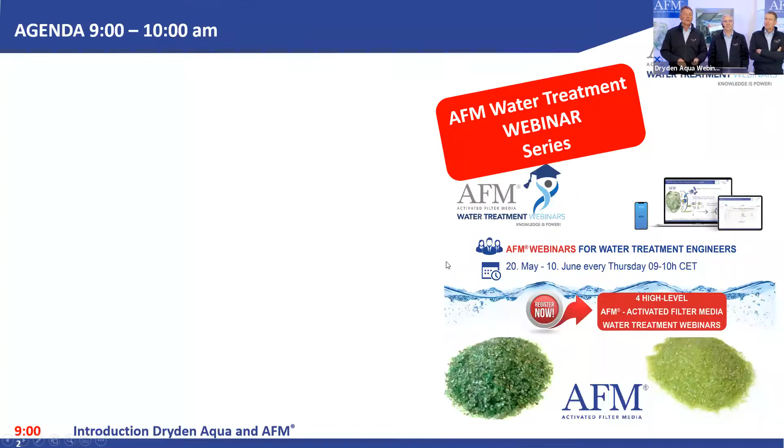So today we give you an overview about Dryden, who we are, and mainly about AFM, what are the benefits and where to use it. And we will have in the next 4 weeks 3 more seminars where we go more in detail in specific applications. Next one. Oh, sorry, I have to lead. So Jochen, you want to lead us quickly through the agenda? Okay, agenda. I don't want to go to any of these lines individually, but of course we have now the introduction of Dryden. Then we go through our filter media, AFM, just explain how it works, how it is produced. And at the end, you are welcome to bring up your questions.

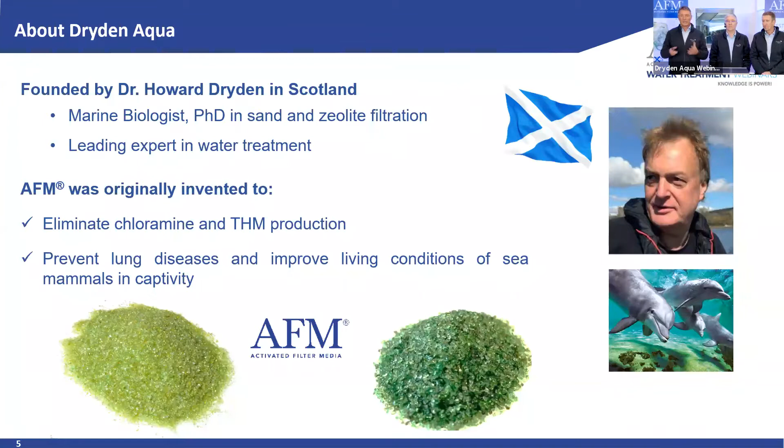And I got a virus, ladies and gentlemen, a very dangerous virus, the Dryden virus. And this virus we want to vaccinate into you because it makes your immune system on water treatment so much better. So I became his biggest fan, very good friend, good customer. I brought him to the pool industry, not just in Switzerland, also in other countries in Europe. And then 6 years later, he asked me if I want to move into Dryden, and we're talking about this in a minute.

Today, we are in 3 different sectors. One of them is pools, where I'm coming from. This is still our dominant sector, where we do 50% of our sales. And why is this? Because I'm coming from the pool industry and I had all my network, and we do really perfect pool water treatment, as you can see here with these 2 beautiful kids. Her mom is on the call. This is my wife.

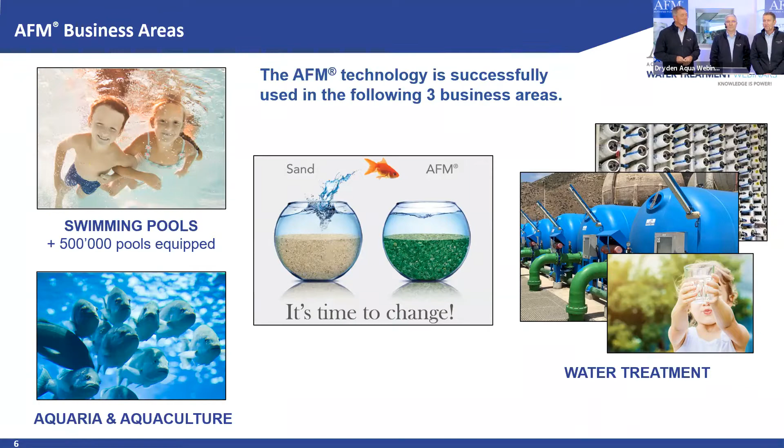About 10% we do in aquarium and aquaculture, and about 40% in water treatment, only 40. And this is why he is here. And this is why you are here, because we want to move this to 50, but not by decreasing the pool business, obviously. And it's also the strongest growth segment by far. Yes, by far. And we are just jumping in.

And here you see a little bit our roadmap, our agenda 2030. You want to lead this? Yeah, sure. So it kind of shows you where we are coming from. It really started out in about 2013 when we built our first factory in Scotland. As of 2012, it was a very small factory, very old-fashioned, doing a brilliant product, but we had to buy a lot of resources and only made the activation. And the turnover was roughly £1 million, which at that time was roughly 1.2, 1.5 million euro.

And we invested in a very latest fashion, state-of-the-art factory where we did all the process, and we invested 9 million from 1.5 sales. We invested 9 million, so it was quite crazy. Yeah, crazy. Brave. I would call it brave.

On top, I brought in Philip, because Philip and I have been friends for more than 30 years. We met in the army. We were together in the officer school. He also was not in the pool business. And I told him, hey, I have here a new challenge. It's fantastic. You will have to work double as much as you did so far, and you can earn half of what you had. And he said, I said yes, but I think I misunderstood. But anyway, I'm still here. So we haven't done it for money.

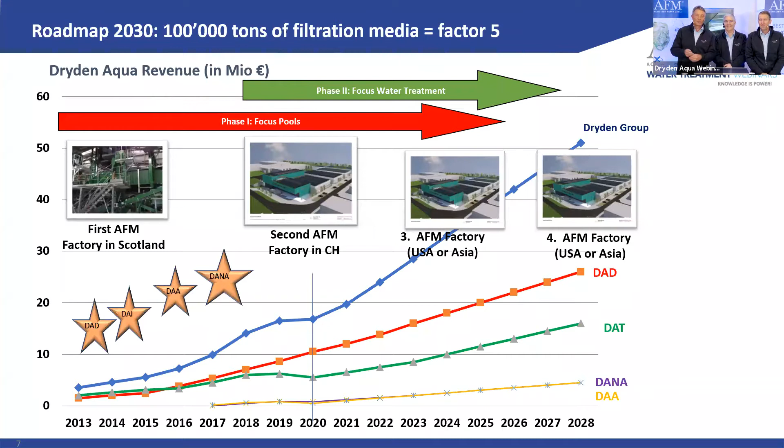And the biggest growth opportunity that we see, and this is our focus for the next years, is our growth in water treatment. This is why this is green. It's not red because we are communist. Okay, that was just the first phase where we focused on pools. Now our focus goes very much on water treatment without ignoring the pools and the aquarium sector.

Exactly right. Where are we? So we have our 2 factories, one in Scotland, one in Switzerland, opened 2013 and 2020. We have a sales office in the US. It's not just a sales office, we also have 5 warehouse locations in the US. So we are ready to supply any projects and any customers in the US. We also have a logistics base in Germany for some of the European or Eastern European markets, also Russia. We have a sales office in Shanghai with a partner there that we work together with. And so we have a really good setup worldwide to do business.

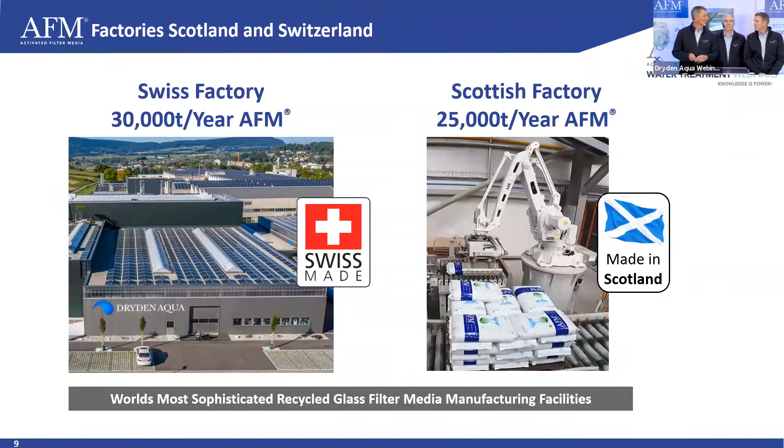And we do this because we have really the world's most sophisticated glass media manufacturing facilities. The one in Scotland from 2013, we just upgraded it over the new year. We closed it for 5 months and invested another 5 million euro to bring it on the same level as this very beautiful factory that we have here in Switzerland. So the Swiss factory capacity, roughly 30,000 tons. That would need 50,000 tons of raw glass. And in Scotland, roughly 25,000 tons. And we estimate to come close to 30,000 tons produced and sold media this year.

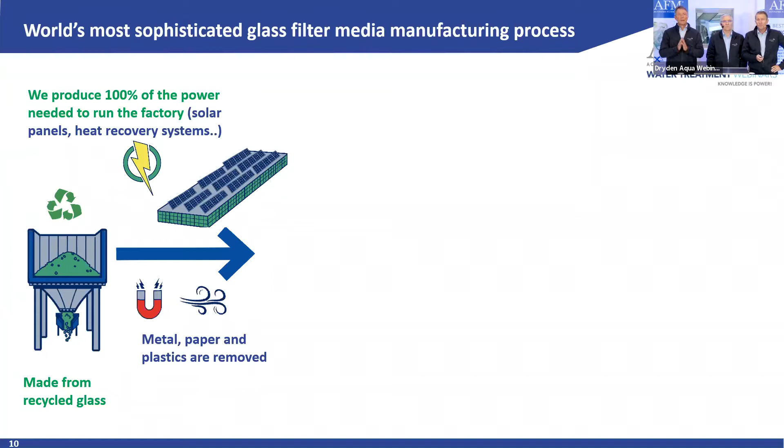Okay. Do you want to lead us quickly through the process? So how is AFM made? Let's quickly talk about this. So we start with 100% recycled glass that we buy from the surrounding areas. The glass comes in, it's completely decontaminated, cleaned, and washed. Here in our Swiss factory, we use 100% solar power to do this. We have 850 kilowatt hours. All our roofs, even the facades, the green color on the facade, this is also solar panel. So we really try to do it as green as possible.

So paper, metal, plastics are removed by putting the glass through a wash cycle, a spiral washer. Decantation, of course, we filter our wash water. We use our technology. It's wastewater, absolutely, and it's quite a heavy wastewater, with decanters and then AFM filters, of course. And really, we just need water to backwash our filters. And for this, we use rainwater because on all our roofs we collect the rainwater, and we have 1,000 cubic meters of rainwater collection. So we close the loop, even the sludge.

I mean, imagine the glass comes in with 50,000 grams of organics. And after the washing process, it's 5,000. So we reduce this from 50 to 5. It's a factor of 10. It's a huge amount. And this creates sludge. And this sludge goes to the biogas, again, to make it as sustainable as possible.

I mean, it's very important to show here that we are also already doing water reuse, which is becoming one of the big topics in the world, right? Water scarcity is increasing, and we can demonstrate, even in Switzerland, where we have a lot of rain, we try here at Dryden to 100% use our own rainwater. Closed loop cycle, exactly right. But we do it because it's also more economic, otherwise it would be expensive. And then this was the washing, and then we go to the real factory.

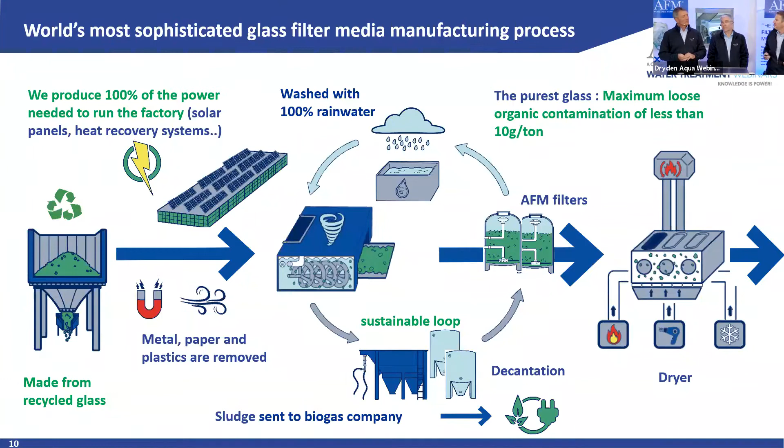Then we go through a drying process, and also in this process, we completely sanitize the glass. We heat it up to what temperature? 70, 80 degrees. 80 degrees. And we have to dry it because in the next step, we go through a color sorting. So we sort out the white glass. We don't want to have white glass. This is a very cost intensive process. First, this cleaning is very intensive, very costly. And then in these beautiful machines, amazing machines which cost really a fortune, we remove all the white glass and just keep the green and the brown. Yep.

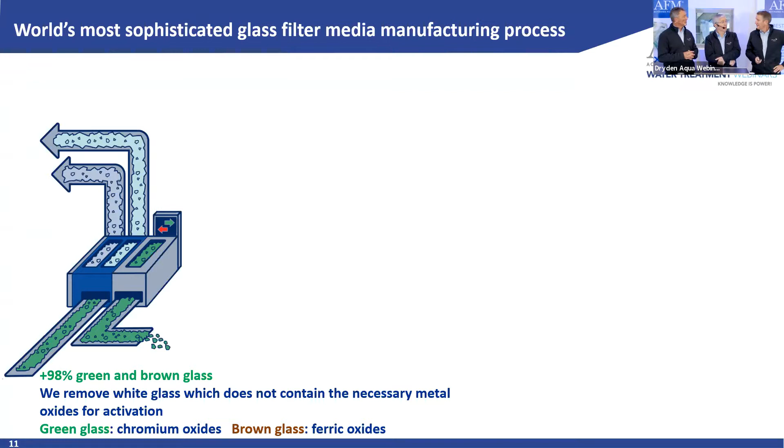So why do we... wait, I'll tell you, in 2 minutes we'll talk about this.

So now we have the green and brown glass only. It's washed, it's sanitized, it's clean. And now it goes through 3 cycles of crushing with soft crushers—soft because our grains are soft. That's why we call it soft vertical shaft impact. Then it goes through screening and sieving.

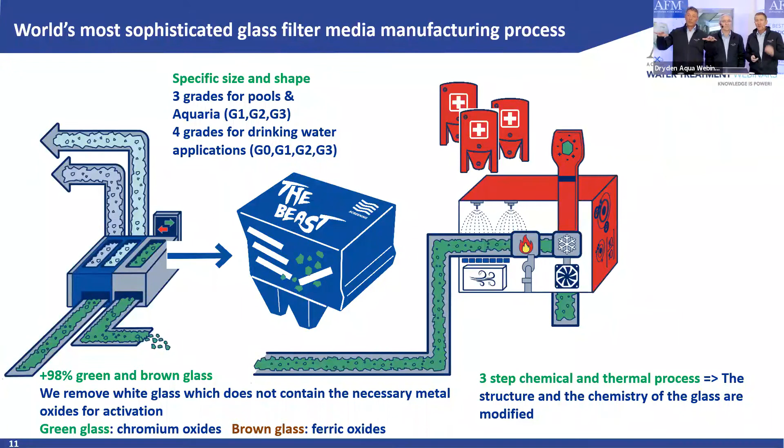We have two screens: the beast, the big one, and the beauty. You'll see this in the video. The beast is the biggest screen in the world in a non-mining application—the biggest in the world. It's a little bit like Tesla; we don't call it a gigafactory, it's a mega factory. So now we have the precise particle size and shapes that we want, and this is now the very best glass media you can have before activation, but it's not AFM yet.

Now we go through the activation process, and this activation process we will not share completely with you. Everybody's interested—what exactly are you doing? We will not tell you. It's like Coca-Cola, they also keep their recipe. It's a 2-step chemical process. This is what we can share.

Then a thermal process where again we heat up the AFM to a very high degree, giving the product much more surface—we increase the surface dramatically, and we also change the structure of the glass. Then from there it goes into the bagging plant, fully automated, and shrouding, fully automated, with various steps of quality control. From there we ship it out—usually when we put it on the truck, it's still warm.

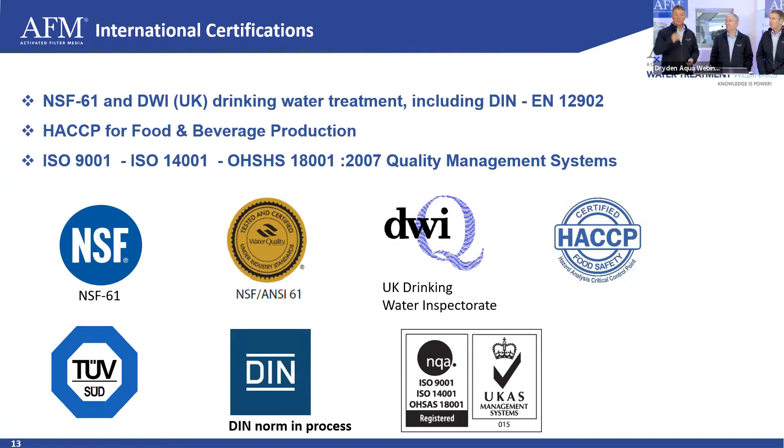By the way guys, we have 140 participants—141. I'm very excited, and we are very good on timing as well.

So in order to really understand the benefits you have with AFM, you have to understand sand, or the disadvantages of sand. Sand is a very good mechanical filter that we've known for many, many years, but it also has disadvantages. One of them is that it's bioactive—bacteria can easily grow on it, and this leads to problems. Let's talk about the biology of sand filters and the main problems.

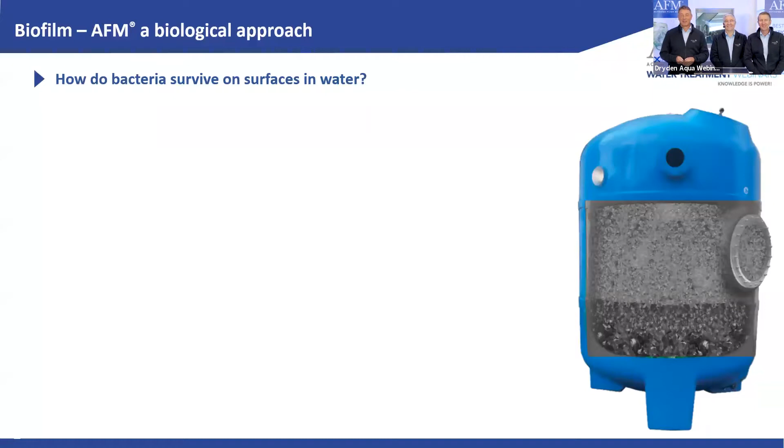Shall I take this, Philip? Or I think it's your favorite subject, so maybe you do it. Yeah, the heterotrophs and autotrophs, right? Yeah, I learned a little bit—that's not my knowledge really, this is coming from Howard.

You know, in water you have different bacteria. You have heterotroph bacteria, which take organics as their food source and produce inorganics. Autotrophs are just the opposite—they use inorganics and produce organics.

Heterotroph bacteria, for example Pseudomonas, can grow very quickly. If the conditions are good—30 degrees water temperature, enough food—they double every 30 minutes. So it goes really exponential, a really exponential growth if the conditions are good.

For example, these Pseudomonas, which are the pioneers of building up biofilms, are in the water, and maybe there is oxidation. They can be easily oxidized with oxidants like chlorine, and they want to survive. So they try to reach as quickly as possible a surface in contact with the water, a wet surface, and that happens within a few seconds.

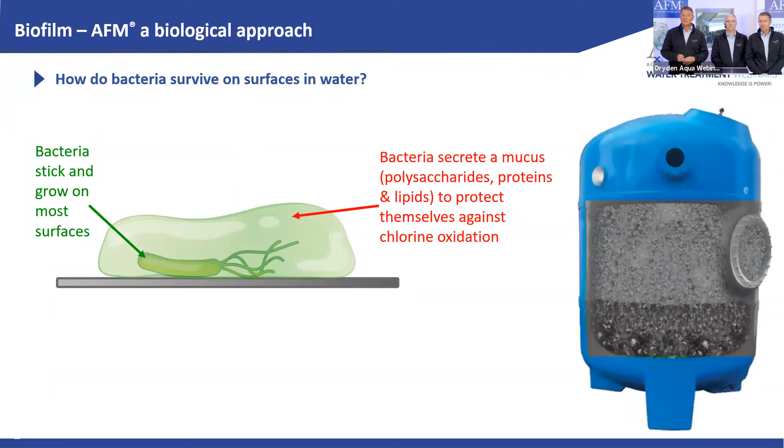The moment they attach to a wet surface, they secrete a mucus, a slime, to protect themselves against chlorine oxidation—they want to survive. That's actually the biofilm, that's what you see and feel, that's what you call a biofilm. This bacteria covered by slime, that's a biofilm, and this biofilm becomes very resistant against chlorine.

Even very high concentrations, like 50 ppm, which is an excessive amount of chlorine, cannot penetrate the biofilm. It has to oxidize through the biofilm from outside to inside, and by this it's losing concentration. Out of these billions and trillions of bacteria, even with a very high chlorine concentration, you will always have a few survivors, usually the strongest bugs, the ones very effective in producing biofilm. Then they are alone, and they have all the food and the nice temperature available.

Huh? That's a bit like Robinson. Yeah, maybe Robinson is not good. And then they grow.

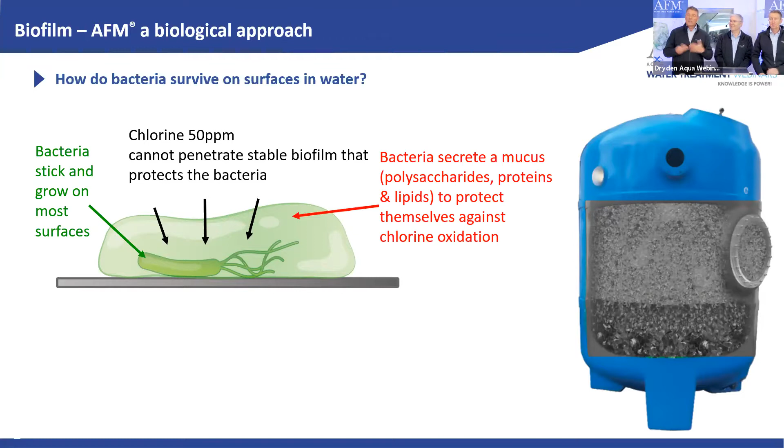So again, very quickly: what does this have to do with the filter media? The sand is the biggest surface in contact with the water that you have in such a system. You have a little bit of piping, but you also have the filter media, and one cubic meter of sand has 3,000 square meters of surface. So it's huge, maybe 95, 98, 99% of the surface that you have. And very importantly, that's not only in filter media, it also continues - there's a large filter area coming from membrane systems if you have an RO system. So that's another growth area for biofilm.

Most of you who join here know about the problems. We will actually come to that in the next session next week. But anyway, I'd like to continue now.

Very often you say, well, I have to chlorinate the sand filter to keep it free of bacteria. That will not work. Often you see over a certain period of time, over years, that a chlorinated system, especially if they are chlorinated at the same level, gets an even bigger biofilm problem than a low or non-chlorinated system. Through this process of natural selection, you kill the weak bugs and leave the room to the strong bugs.

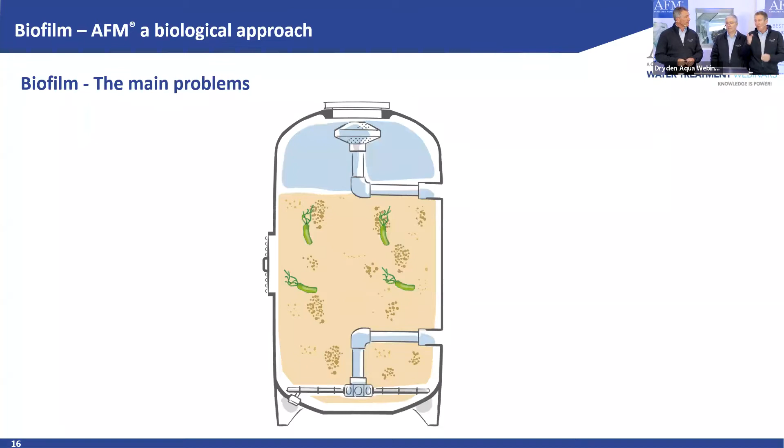You have channels that are starting to form through the filter bed. This leads to a very inconsistent and unreliable filtration. It can happen that unfiltered water actually gets through the filter, and this is obviously something that we need to avoid.

I mean, that's like highways - water goes through these highways. So you have turbidity that increases, spikes up and goes down. It's very inconsistent. And these channels, from time to time when they open, you have a breakthrough of this biofilm, and this is when your product water gets very high turbidity - this is when you have this breakthrough.

Now you will maybe say, well, this is not happening - when I change my sand, it's working perfectly for 3 months. This is true. The problem starts after 3, 6, 12 months, depending on the temperature, the load, and the backwash regime that you're having. But it's starting a little bit later.

And why is this? This is because of these autotroph bacteria. When they move into the system, they produce the food source for the heterotrophs, and this is when this biofilm problem starts to become a lot more dramatic. They are not doubling every 30 minutes, but every 10 to 12 days, and this is why it takes a lot longer for them to move in. But once they are in, it becomes very dynamic.

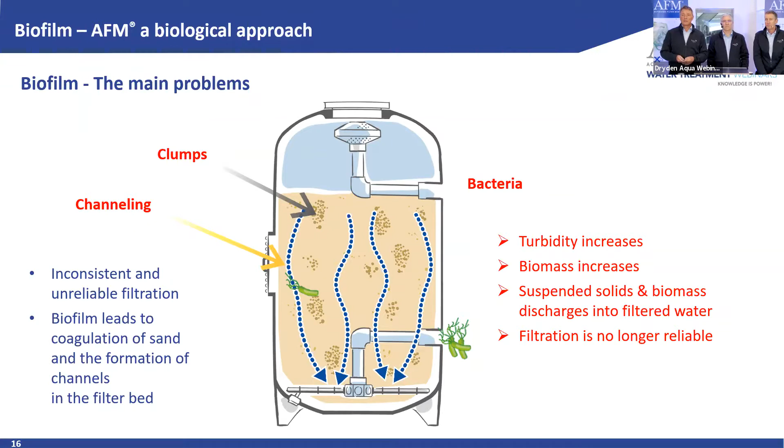No reliable filtration - there is an easy way to avoid this. The easy solution is to use a bioresistant filter media, and there's one I really recommend, called AFM. Maybe you're surprised. Okay, Philip, please explain why this is.

So how is AFM bioresistant? How does this work? We mentioned earlier that we use only green and brown glass. This is very important because green and brown glass contain metal oxides, chromium oxide, iron oxide. On the surface of the grain, there's a catalytic reaction that takes place, where these metal oxides react with oxygen in the water.

And this forms small amounts of free radicals. This is what you see here - these are the hydroxyl radicals. So you have H2O, the water, and you need a certain amount of oxygen, not a lot - 2 ppm of dissolved oxygen is enough. But if you have this on the surface, remember in the activation process we increase the surface by a huge factor together with the metal oxides, so you're creating these free radicals.

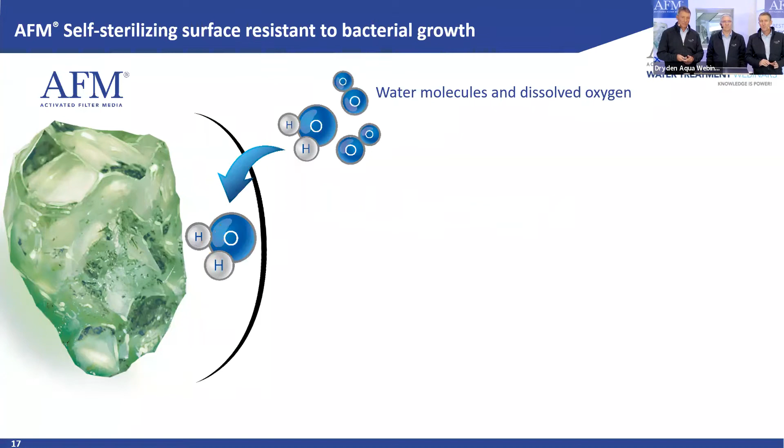I show it again because I like this - this is from Flo, he's also here. This is what you're turning. It's a small amount, but it's really enough to protect against these bacteria who want to reach the surface of AFM, to attach, to build up a biofilm, because they want to survive, to protect this. They cannot move in.

If I want to jump in quickly here, it's very important - this is the activation which we make through our production process. So that's not for all glasses, just so people don't misunderstand - that's not a normal glass, that's our activated surface area. First, as a raw material, you have to have the metal oxides in it.

If glass manufacturers are using green and brown glass only, that already gives a benefit. But the other factor is because you increase the surface by such a huge amount, and this is a surface reaction - if you increase the surface by a factor of 100, obviously you have 100 times more free radicals, which protect you against this biocolonization.

I think we are doing it pretty good as a team. Yeah, that looks good. Actually, going to the topic of biogrowth on surface areas - here's a picture of sand, clean and fresh on the left side, and after a couple of days you see the growth of bacteria. That's normal for every surface area, as we explained before.

So after 3 days, you have a colonization of bacteria. If you take fresh AFM on the left side, then in this example, after 5 years there is no bacteria growth. So we proved that this hydroxyl radical generation on the surface area really protects from biofouling.

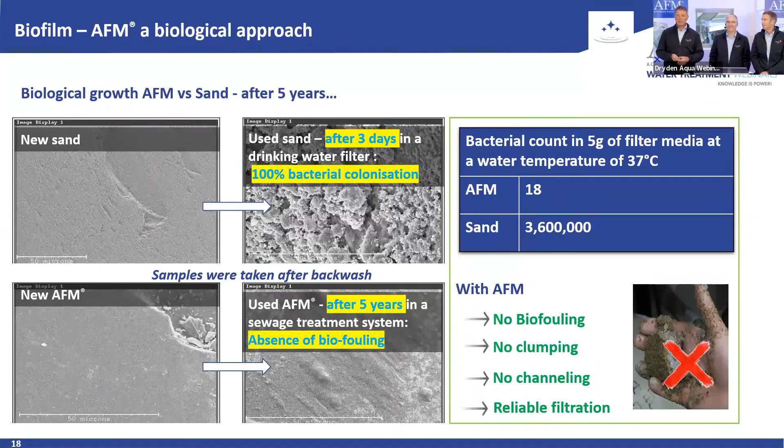After a decent backwash, he took out 5 grams of filter media, put it in sterilized water, and then put it on the Petri dish. This is the difference in germ counts - 18 to 3.6 million, which is a factor of 1 million. Now, 1 million is a big number. I always say a factor of 1,000, and then you correct me, Dominic, you're wrong, it's not 1,000, it's 1 million. Okay, I'm happy to make these mistakes to get these corrections.

Okay, next topic - let's talk about the surfaces and the filtration properties. First we want to start with this: we have 2 types of AFM. Until 2-3 years ago, we only had our AFM and nothing else. Since 2 years, we now have AFM NG, and NG stands for next generation.

So yeah, this is like with the iPhone, each version gets better, right? This is why we now call our old AFM standard - which is fantastic, a brilliant filter media - and AFM NG, the next generation, which is even better. And the better is the enemy of the good.

What do they have in common? They have in common both that they have the self-sterilizing surface. Both of them are bioresistant, and both of them have a completely increased surface.

I pass this now to you because my colleagues always say you take all the lead. You like to talk, everybody likes to talk here, so we try to balance that at least as best as possible.

Coming back to our difference here to other media, but which is the same for the AFM standard and the AFM NG. So here we have the high surface area. This looks a little bit like the Swiss Alps, but that's important because on all of these surfaces, we generate these free radicals. That's why we have this very beneficial performance of not only being self-sterilizing, but also a superior mechanical filtration performance down to 1 micron. We'll show you in the next slide.

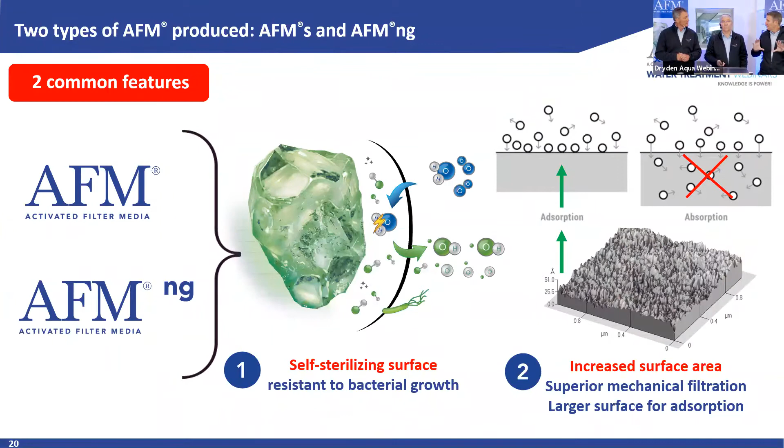The same is with activated carbon. You also can reactivate it. We don't need this with AFM. You just make a decent backwash, and then you can keep the product for many, many years. Yeah, we don't talk about chemical removal here. Really, we talk about mechanical filtration properties. Okay. So that's what both products have in common. These two things. So, Philip, you want to take this?

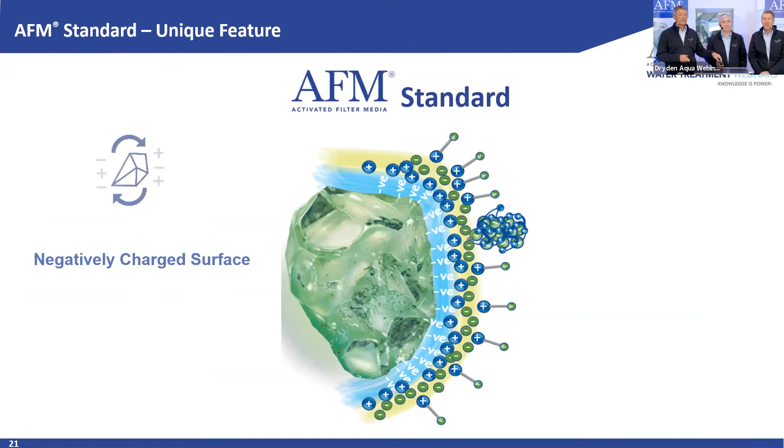So one thing that's unique for AFM standard now, right? What's unique to AFM standard is that the activation chemicals that we apply give AFM a negative surface charge. A very high negative surface charge that you see here. So this makes AFM standard very good at attracting positively charged particles. This is the main application where we use AFM standard today: the filtration of heavy metals, iron, manganese, arsenic that are precipitated.

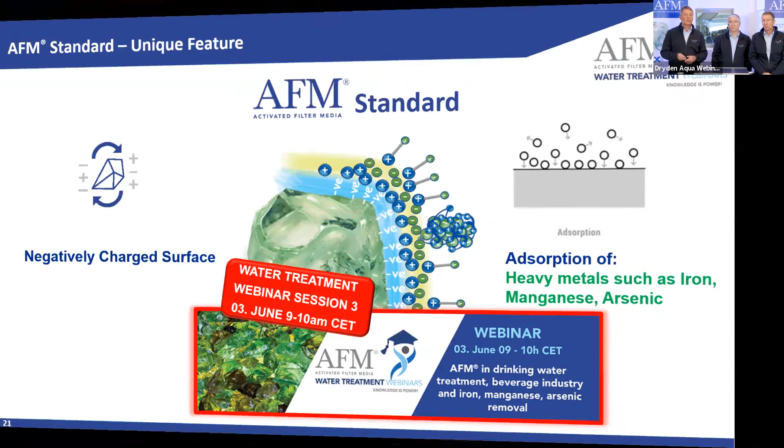Yeah, exactly. So again, to clarify it, AFM standard is a great product, fantastic product. We just have now a better one, the NG, for most applications. One application where AFM standard is better is heavy metal removal. And we talk about this in detail in session number 3, where we talk about iron manganese removal, drinking water, beverage industry. So if you're in this field, please join us.

AFM-NG: the better is the enemy of the good. Howard developed this to remove microplastic. AFM standard is not perfect at removing microplastic if you don't add coagulation, flocculation. So he wanted to develop something which is non-polar, which has no charge, which is hydrophobic, and which can really remove microplastics. Howard today is not that active anymore. He's always available and helps us, but he passed his role as chief technical officer to his son, Matthew.

Brilliant guy, brilliant man. So we have all his support, but Howard's focus today is on GOES, on the GOES Foundation. You want to say a few words about the GOES Foundation? Yeah, this is a foundation that he started to drive initiatives to improve the health and the quality of our oceans, basically. He's very much concerned about that. I think we all are concerned about pollution of our oceans. And so this is what Howard is doing now.

To keep it short, he says the biggest problem we have is in the ocean. If we lose the ocean, we lose the planet. It's the base of our life. And one of the big problems is microplastic that we have in our drinking water, in our wastewater, in the oceans. Why? Because on the microplastics you concentrate all the toxic chemicals, and then they come in high concentrations and move up the food chain.

From the plankton to fish. We lost 40% of the plankton in the ocean over the last 70 years, so this is a problem. And this is why we really should avoid microplastic or filter them out. Now, how to filter microplastics? Because they're hydrophobic, they don't like water, you have to use a hydrophobic filter media, such as activated carbon or AFM-NG.

And when we tested it, we found out this is amazingly great for microplastic, but also for other organics, proteins, oils, lipids. And we found out it's even better than AFM.

Very important is water treatment, let's say seawater desalination processes. There's a lot of oil hydrocarbons in some of the open intake seawaters. We can remove that oil with our filter media together with the perfect high filtration of particles, and we can really achieve super clean water after our filtration process.

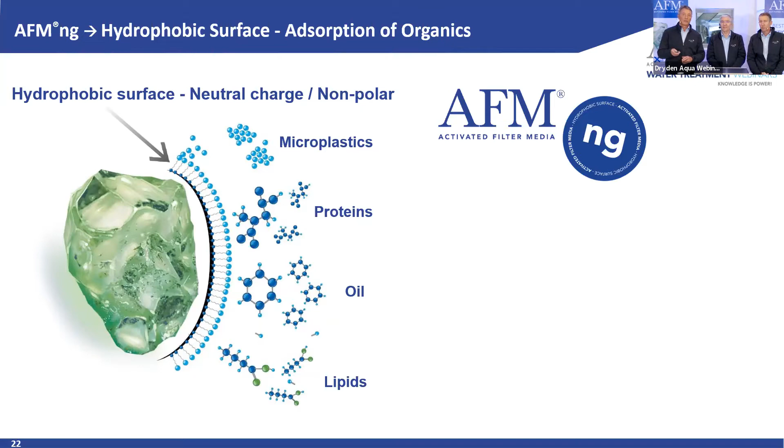Roger, I don't have any more control. No, thanks, okay. I have.

So it's very good for this. Let's explain a little bit hydrophobic, hydrophilic. Philip, you want to take this? Yeah, okay. So we were talking about AFM standard, which is a hydrophilic media, which means it loves water. It allows hydrogen bonds to happen. And hydrophilic molecules like other hydrophilic molecules. It's like humans, some like this and some like the other, right?

On the other side, we have AFM-NG, which has a hydrophobic surface, which means it repels water, and hydrophobic substances like each other. So this is why AFM-NG with its hydrophobic surface is very good at filtering out other hydrophobic substances, such as hydrocarbons or microplastics. And on this small video, we can easily explain it.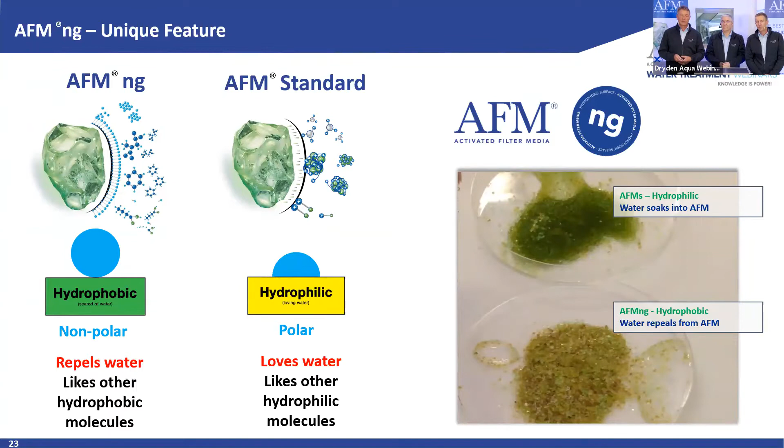Can you prove it? You can, but it's quite a difficult process with AFM standard. With AFM-NG it's very simple, you can show it. So all clear, AFM standard, AFM-NG. Maybe to mention that even if it's hydrophobic, it's not floating. We really have control over the production process, so it works perfectly as a filter media.

We also write this in our manual. You have to treat it a little bit like activated carbon. You should put it in water and leave it there for 24 hours before you make your first backwash, because in the first few hours a few particles are floating. And it's also normal that there are a few fines that you will lose in the first 2-3 backwashes.

As I mentioned before, in the washing process we reduce the organics from 50,000 that the raw glass has to 5,000. Then in the full crushing process, where we always suck and blow the contaminants out, and the activation, we bring it down to 5 grams organic. So in 1 ton of AFM, 5 grams organic, mainly paper, but it's nothing. You might also see a little bit of this on the filter bed in the first, second backwash.

Absolutely. But to summarize, in this activation process, we decide whether we make AFM standard, with a high negative surface charge, or AFM-NG, hydrophobic.

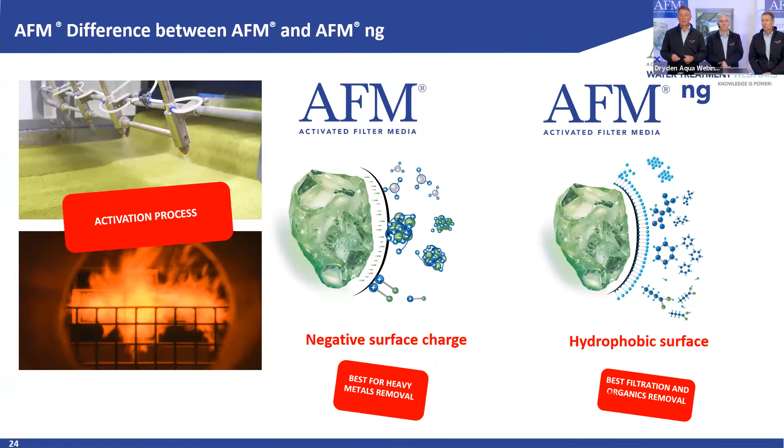This is for most applications, organic removal, and especially for heavy metals. Okay, you want to take this? Yes, thank you. So besides having 2 different filter media AFMs, we also have different types and grades. Here first, grade 3, that's our support layer. Mainly we use that in the application to support all of our other grades coming on top.

Important here, this is also self-sterilizing. So we really want our filters to purely use our AFM, because this provides you with the best filtration performance. There's no biological growth on the bottom or in all of the filter where you use the AFM. So no gravel, etc. If you do it, it's at your risk. Don't come to us and complain, well, I now have bacterial growth. You can avoid this if you use only AFM.

Okay, but that's really to cover the laterals, to make a support layer, and then the grade 2 you can use if you have a nozzle plate with a slot size of 0.5 or 0.2 millimeter; you can use the grade 2 only as support layer. The beauty of this grade 2 NG, it's filtering fantastically. Not as good as the grade 1, but fantastic. I mean, down to 5 micron. So as good as our old AFM standard, it's really amazing.

So you can use it as a support layer or as a filtration layer. Both together. You can use it as it is a hybrid. It works in both directions. Exactly. It is working as a support layer, but on top it's a filter layer. And this is why we also changed the layering a little bit. I mean, about the layering we talk later on.

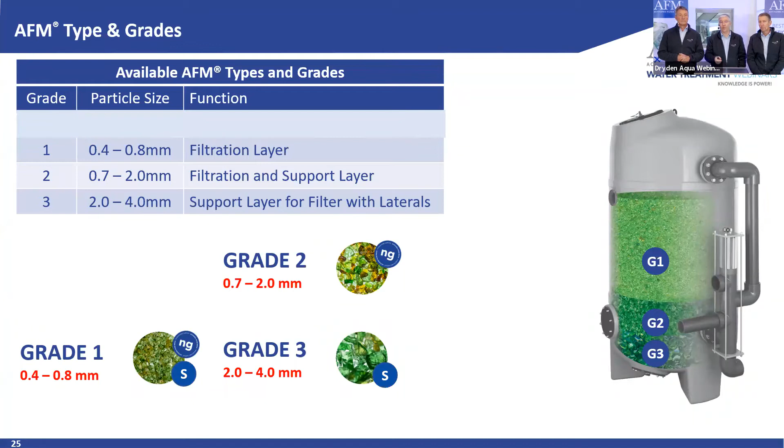Okay, so then the next layer, that's actually the main filtration grade. That's the grade 1, 0.4 to 0.8 millimeters. This is really the one you can get as NG or as standard. As we mentioned before, 2 different types you can use as the main filtration grade. Here we really go down, superior performance of filtration of particles, better than any other filter media, down to 1 micron. Already with the grade 2, by the way. Of course, yes. But even better, improved by grade 1. Yeah, sure. Because the smaller the grain size, the more surface you have.

And exactly, with the grade 0, this is very fine. It's not powder, but it's really fine, 0.25 to 0.5. This goes then really to, we couldn't measure it, but I guess it's 0.5 micron, so it's very fine. But this one we cannot do in NG. It's technically not possible. So we use the grade 0 if we need very fine filtration, if we cannot use coagulation and flocculation, or if we have very low backwash velocity in existing installations. I know it's getting a little bit complicated.

Next one, please. So maybe important to mention at the end is, yes, we can even put another layer on top of it. If you have a high load of suspended solids, then we really recommend you add anthracite on top, 30 ppm or higher of suspended solids, or turbidity more than 10 NTU. We really recommend adding some anthracite, not because you have better filtration. This is really to improve your run phase between the backwashes.

Yeah, the only thing, this will not improve your filtration performance, not at all. It's just filtering the heavy particles, or for example, in your pre-treatment before RO, if you have an algae bloom in an open intake, instead of having these algae make a layer and block the filter bed, you catch it. Exactly. And then sometimes you use grade 0, because some of these algae are very small.

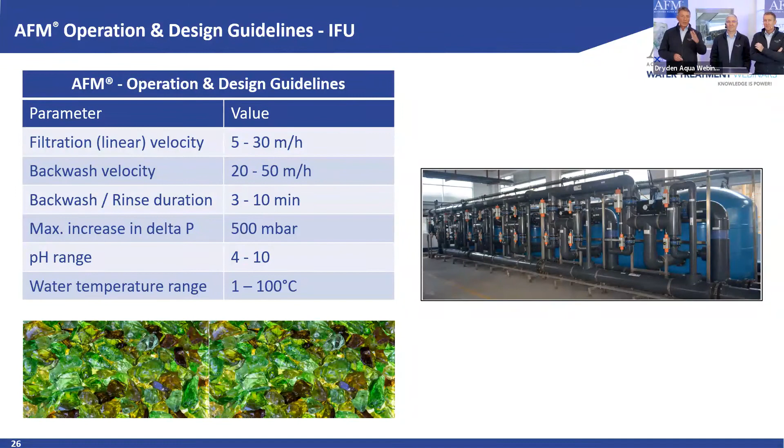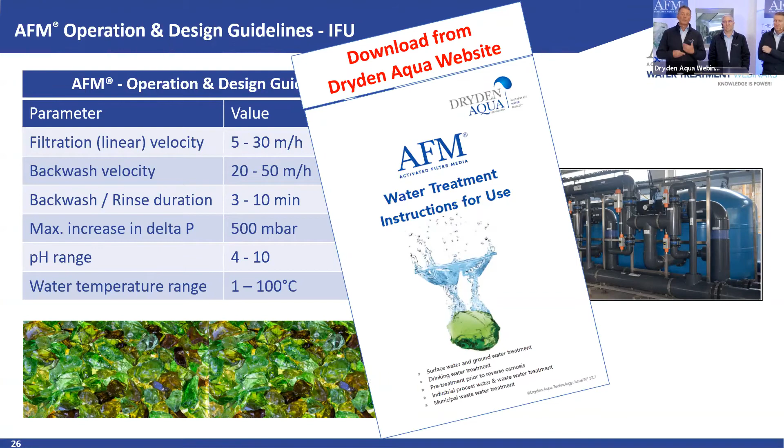So about backwashing, we can talk a lot more, because backwashing is in your IFU. It's a very good document from Howard and you and Matthew, easy to read, but again, come back to us, let us comment to start the cooperation, and then after 2-3 projects you will be sure and can do everything on your own, and we will also have some calculators. I will talk about backwashing a little more in the next slide.

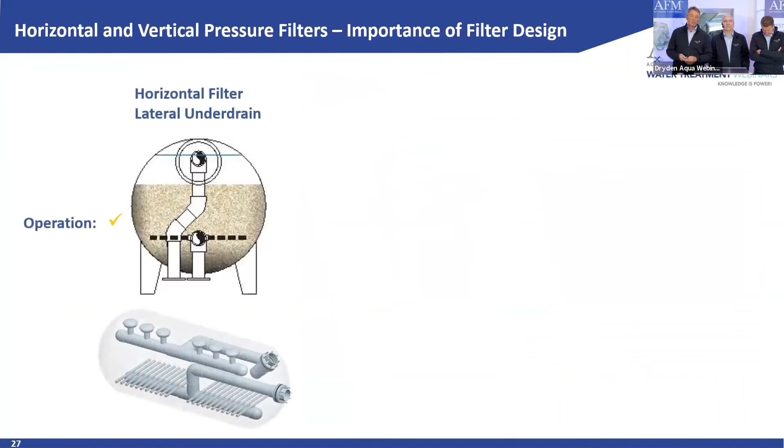AFM, the filter media, is the software, but you also need hardware, and the hardware is the filter. As you all know, there are different hardwares. We have horizontal filters with laterals or with a nozzle plate, and vertical filters with laterals and with a nozzle plate. Horizontal filters are not the best. Vertical filters are better hardware, because there you have equal flow, equal speed. In filtration the velocity will not change, and also not in backwash.

In horizontal filters, you start slowly, then you get fast. And in the backwash, it's the opposite: you start fast, and then you get slow. They're still perfect, these horizontal filters. For the same price, you get much more surface, and this is overcompensating the disadvantage. But just so we have mentioned it, as basic knowledge.

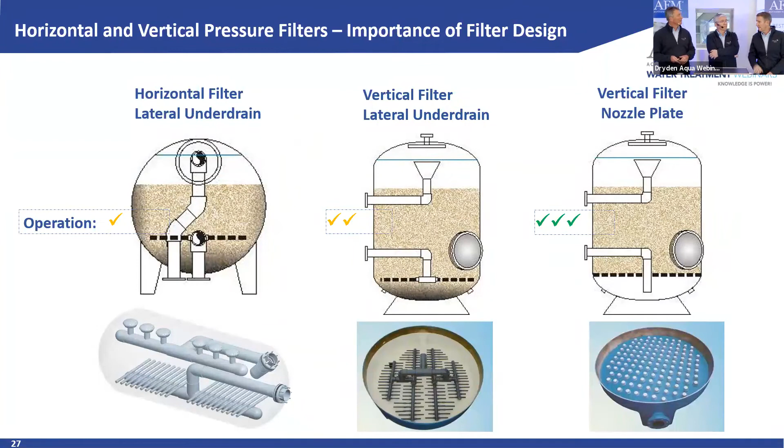Number two, back to AFM. AFM of course works best in the best hardware in this filter, but it will also work brilliantly in these filters, especially in horizontal filters, especially in lateral configurations, because you don't need this air scouring. And the third point is, the weaker the hardware, the bigger the difference you will see. That's why AFM performs in all of these filters much better than sand, but especially here you will see a huge difference. We see this also in the case studies later for an existing horizontal filter.

Dominic, you're on. Gravity filters. Gravity filters, yes, that's your thing now. Yeah, that's actually one filter I was just filling up together with the customer a couple of weeks ago. It's running now perfectly fine. It's green, so it's AFM inside. It works perfectly, much better than sand in this application. Just to mention, we don't only do pressure filtration, so if you have any questions about using AFM in rapid gravity filtration in general, please come to us and we can help you design the right filter bed.

Gravity is great, and it was his first project, and he was on the installation. He was blowing in this AFM. Yes, exactly. It was a little bit green, but it was okay. So that means you go now to each installation and blow it in? Probably not for each, but of course if a customer calls me, I would like to. The answer is no, we don't have the budget to do this. Okay, then. Unless you're in Switzerland.

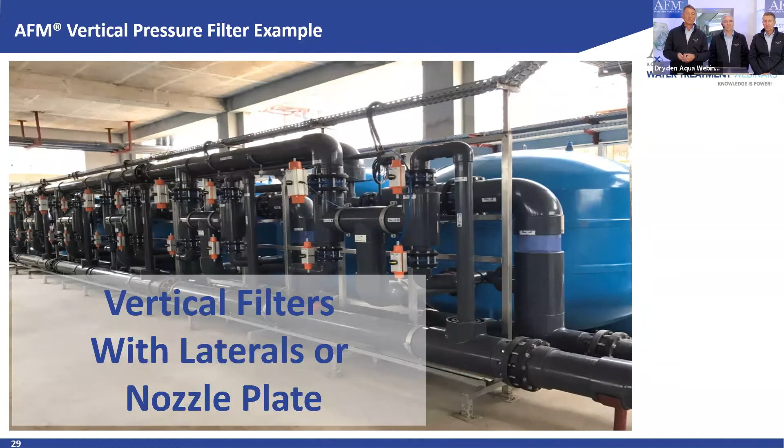But as we said, we can use it in vertical filters. That's an installation that we have in Bangladesh, one for groundwater and one for heavily polluted textile water, 300 cubic meters a day. This I pass again to you.

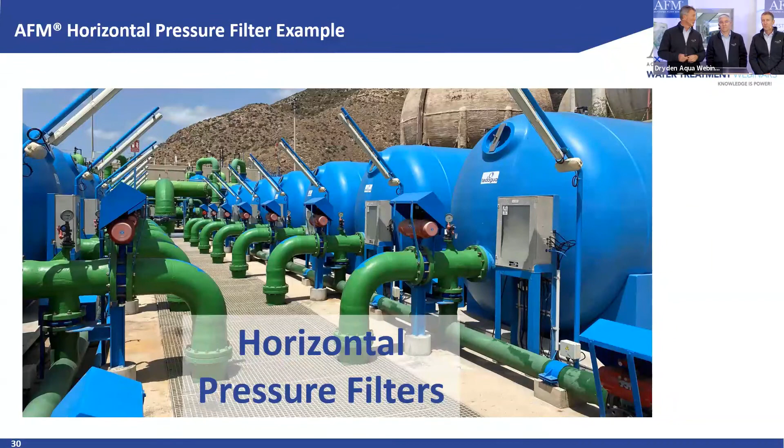And we will ship in 2 weeks the AFM for the first filter, and then for the next filter, and then we fill it up. And I'm very, very sure we will halve this. We will be around 2. Yeah, but we'll show you when we have it. 2 means an SDI of 2. Yes, if you talk about SDI figures, 2. Okay.

Shortly for the performance, Philip, you take this. Okay. So you can believe what we say, we are trustworthy, but maybe even better, believe the white papers, believe the tests. These are the test results conducted by IFTS, the French Institute for Filtration. You see here the particle removal rate on this axis. On the horizontal, you see the sizes of particles.

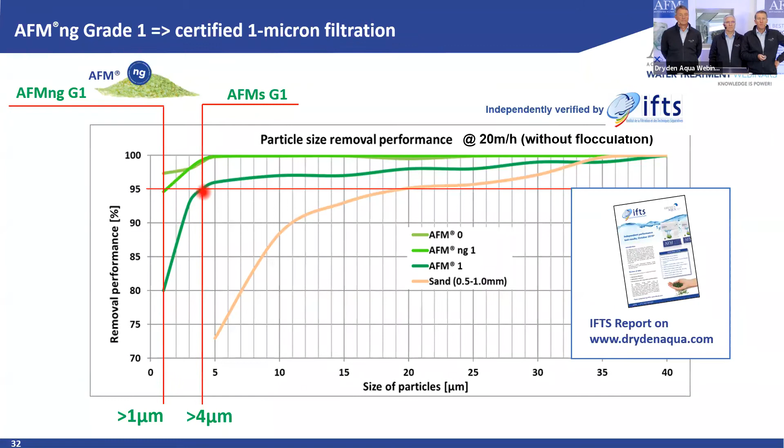What you see here is that AFM NG grade 1, the lighter green line here, gives a removal rate of roughly 95% of 1 micron particles. Then for AFM standard grade 1, we have a removal rate of 95% of 4 micron particles. And if you compare this with fresh new sand, best performing sand, no biofouling, you see that 95% removal performance is at 20 microns.

And this may not look like much. 20 microns is small, 4 microns is a bit smaller. It's a huge difference. It's a planet in between. Oh, it's actually a galaxy. It's a galaxy. Exactly.

However, one thing I want to mention, this was measured at 20 meters per hour filtration velocity. So not the best condition for water treatment, but these tests cost a huge amount of money. We can do these tests in our lab as well, even better, but we wanted IFTS to test this independently. We also tested a lot of glass media, and they were terrible. Sand was the best after AFM, and between sand and AFM standard it's a world in between, and to AFM NG it's a planet in between. We also have this in a report.

Exactly, as I wanted to say. And you can download it from our website.

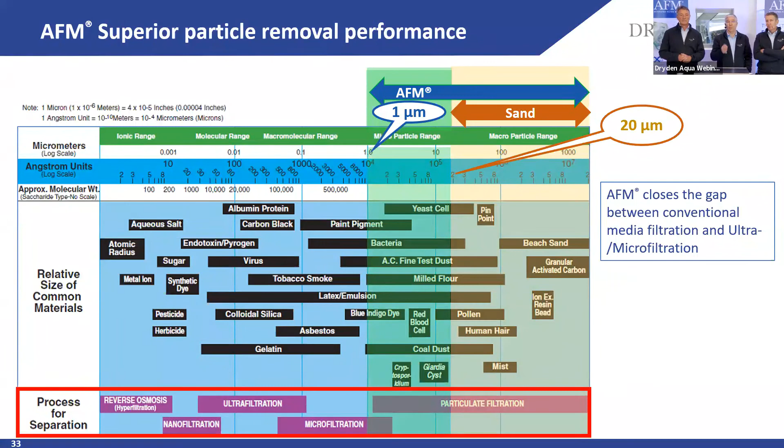So where does this fine particle removal fit into a scale for separation processes: particulate filtration, micro and ultrafiltration? Sand is typical for particulate filtration, used for pre-filtration before RO membranes. But now the game changer is AFM, which can go down to microfiltration, and even further with coagulants and flocculation, down to 0.1 micron. So we're actually touching the ultrafiltration membrane market now. We really close the gap between media filtration and membrane filtration. This is different to before—we offer a new solution on the market. Besides standard media filtration, which we do superior to sand, we also go down into micro and ultrafiltration.

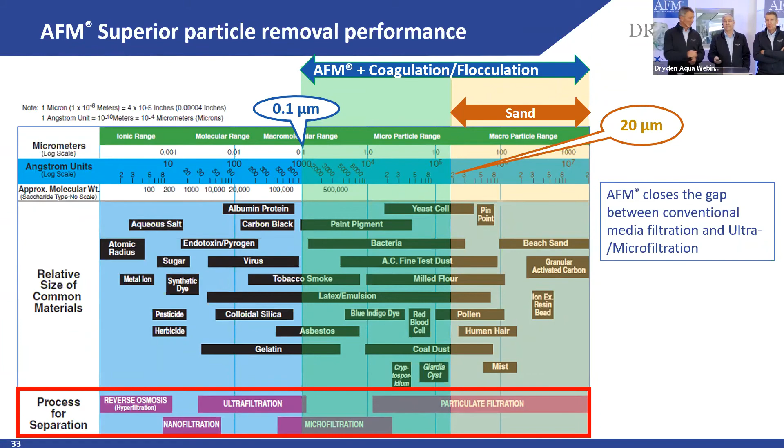Perfect, I have to lead back. Okay, let's talk quickly about backwash. My comment before, we didn't lose everybody, we still have 150 people.

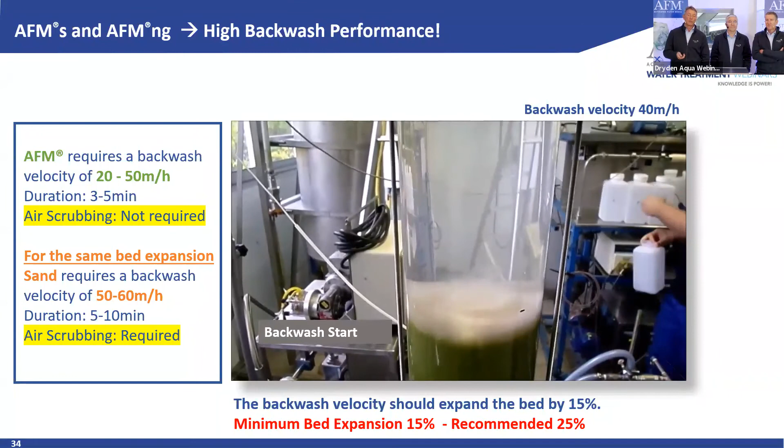This is the lab, IFTS, Institut Filtration Technique Separative, and here you see how they test AFM, and now they do a backwash. In this column, which we don't usually have, you see the bed expansion. Bed expansion of minimum 15%, better 25%, is really important, because you have to bring these adsorbed particles to the surface of the filter media and then wash them out.

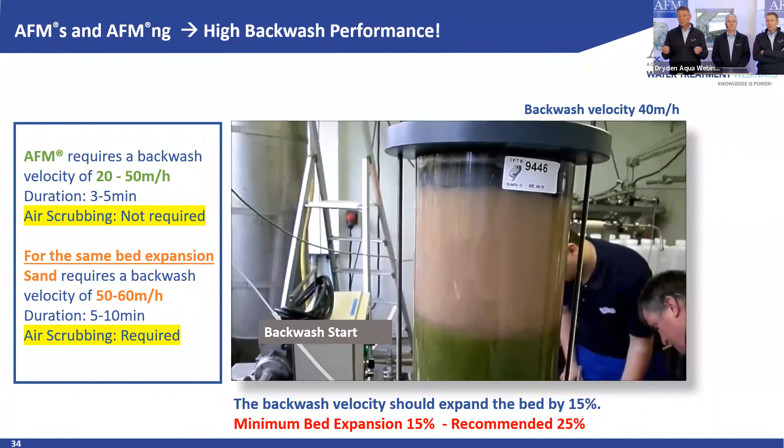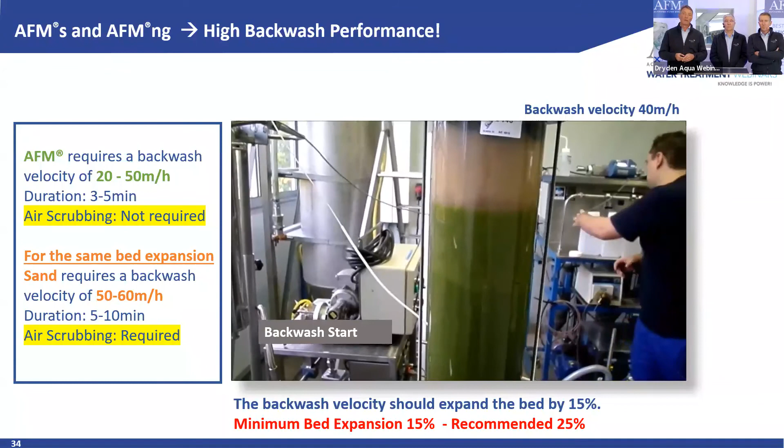To wash them out you need a certain velocity of the water. It depends on water temperature, size grade, and whether you have sand or glass. Glass is 20% lighter than sand, so you need 20% less velocity. We tested sand and AFM: AFM usually needs grade 1, 20 to 50 meters per hour backwash velocity. The same size grade of sand needs 50 to 60. If you backwash really at 50, we only need 3 to 5 minutes.

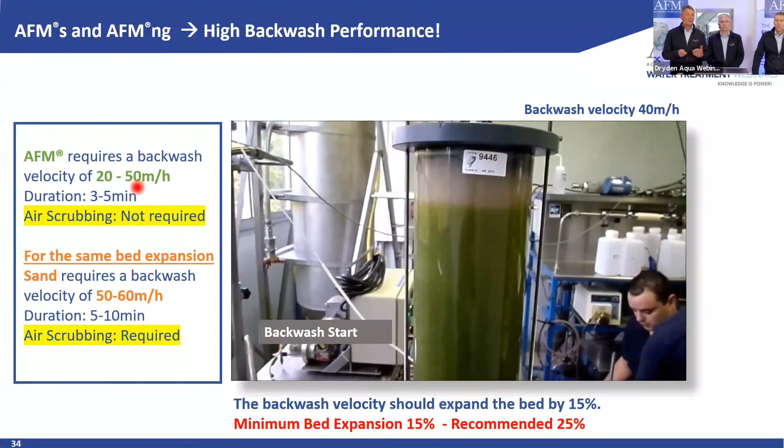We can go down to 20 meters per hour for existing installations, like the Contreras project we saw before. If we can only backwash at 20 meters, we just use more grade 0 to compensate, because there you have higher bed expansion. But don't worry about this—we will work this out together with you. These columns just help you understand that you need bed expansion.

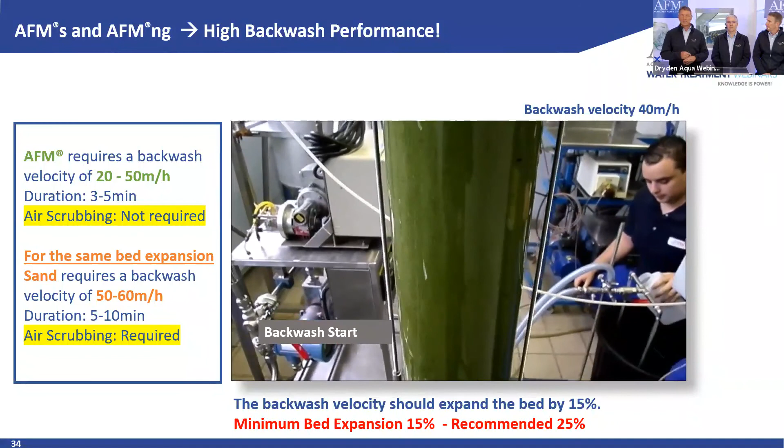If you're below 20 meters per hour, we don't have a solution. If you say you cannot go higher than 10 or 15, we don't have a solution for you. You need to overcome the specific gravity—you need speed to flush out all your particles. Especially with heavy particles like heavy metals, we need 40 to 50 meters to wash them out. But also just for bed expansion, we need a certain velocity.

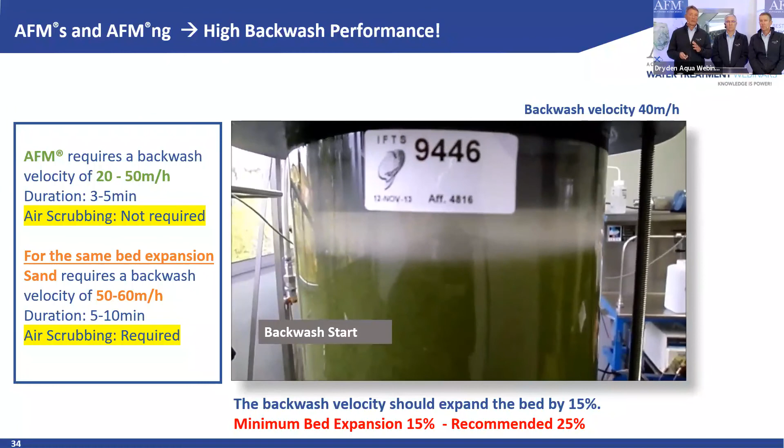We'll talk a little more in detail about this in coming sessions. We still haven't lost anyone, we're still gaining people. This is great. This is what the backwash process looks like, and it's not so well known in water treatment. I was very surprised by this—not to criticize you.

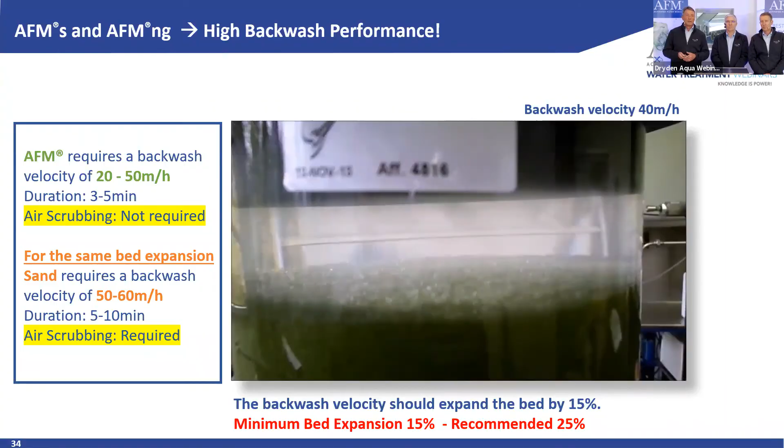So we come to the end and give you a few case studies of where you use AFM. Do you want to take the first one? Yes, I'll take the first one here—that's a refinery in Greece.

Here we worked together with our partner SciChem, who installed this great plant. Congratulations on this very nice, well-running plant—Calimera. We use this in this case for RO pretreatment, treating cooling water and blowdown water.

And in the other plants with the vertical filters, we are treating seawater to add more on the cooling tower treatment process. So this is a combined plant treating wastewater from the cooling tower and fresh seawater from intake.

Here we achieve an SDI of 3 from a starting point larger than 5, and we achieve a very good turbidity of less than 0.5 from a starting turbidity of 10. This is actually quite a large installation, 1,100 cubic meters per hour, so that's not really small.

So my friends from SciChem, Nick and your colleagues, I'm not so happy with this less than 3, but we haven't got really deeper data from you, and you're great guys. You make a fantastic installation, but provide us a little bit more data. Here with the turbidity reduction, I'm very happy.

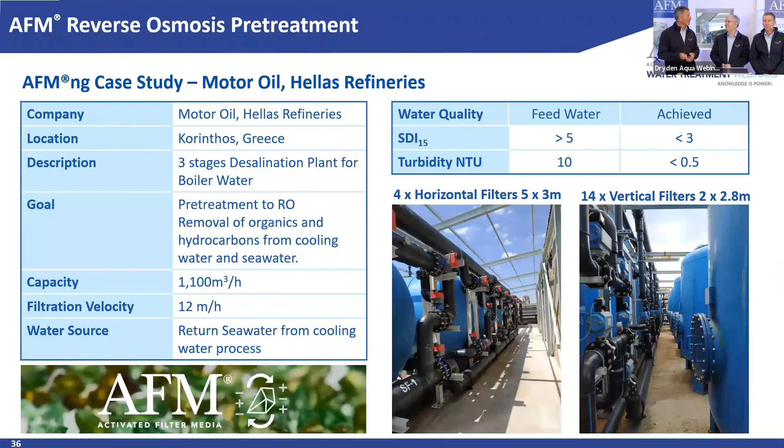Okay, next one is heavy metal removal. This was a project done by our friends BioVista in Bangladesh for Square, a pharmaceutical company. They need RO water. They used to have groundwater, which they treated first with sand filter, then activated carbon, then a cartridge filter as a safety filter, and they had huge problems with iron, and especially with pseudomonas. Iron levels were really high, and also quite high turbidity, since it's groundwater.

And we replaced this just with good aeration for 2 hours of the groundwater, followed by some coagulation, followed by AFM filtration at 5 meters. They really followed completely our recommendation, and look what they have achieved, from 10 to 0.03.

Would I promise you this blindly? No. Usually we promise a factor of 20, but this is a factor of nearly more than 100. So they have done it extremely well, but you can do this also with arsenic. The turbidity was good too, and especially we solved all the problems with the Pseudomonas.

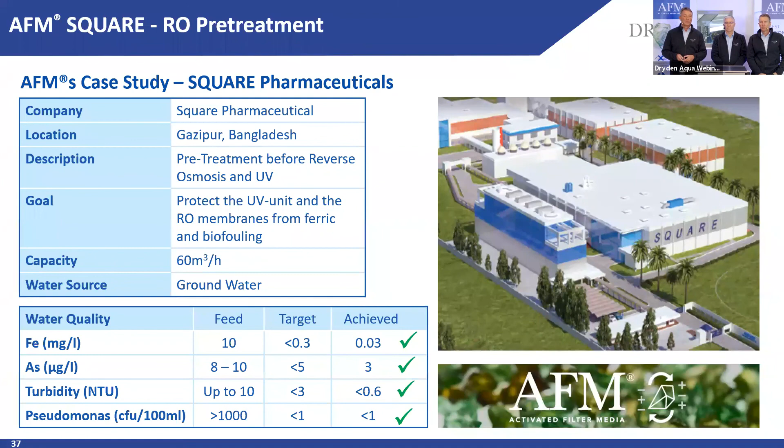And now we are moving to South Korea. The next one is cooling tower makeup water filtration from our partner Samyang in South Korea. Water source was surface water from a river, capacity 180 cubic meters per hour for 3 cooling towers. You can see the feed water quality here with a turbidity of around 10 NTU. Achieved was less than 0.5.

And also, if you look at the reduction of other parameters, suspended solids, massive reduction. This was mainly using Grade 0. This was also before we had the NG, just to mention it.

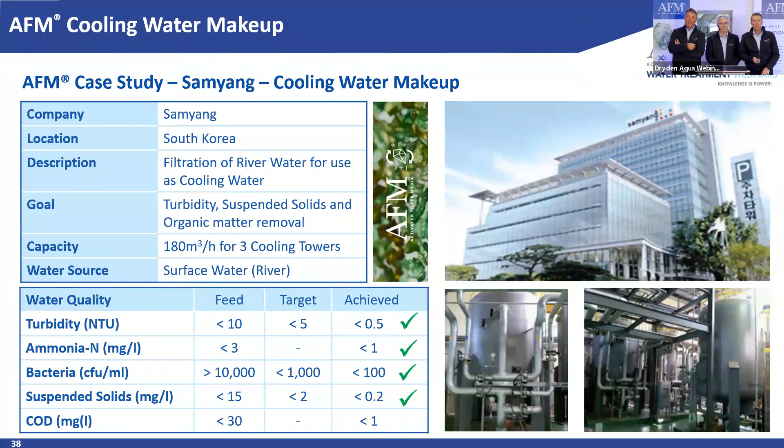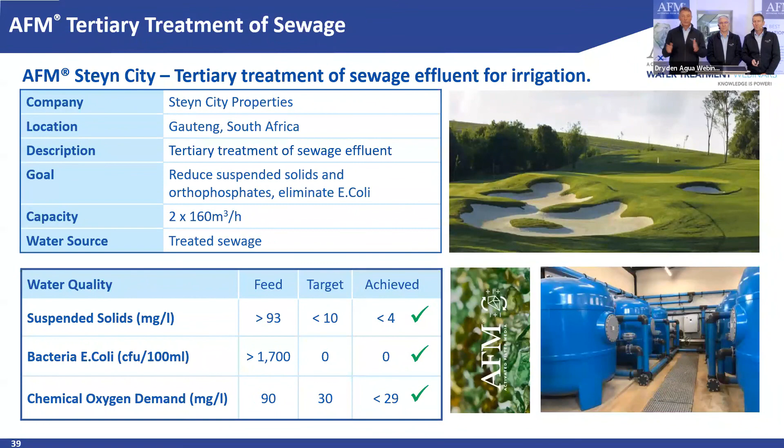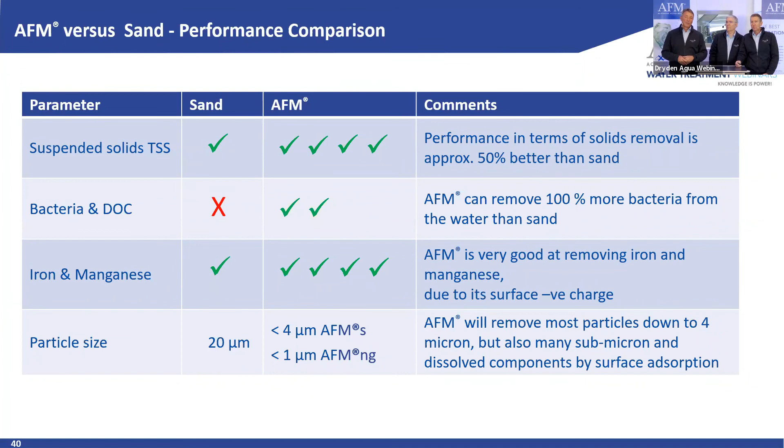And can you go to the next one? We will also talk later about the return on investment. We can do some return on investment calculation.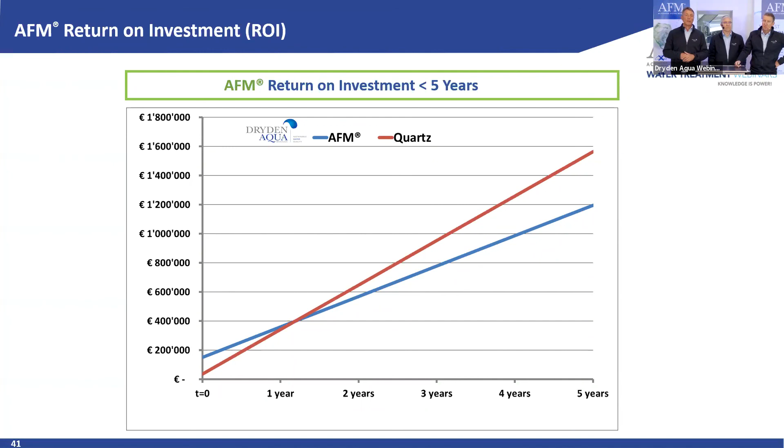We don't want to do this with each and every small project, but in the beginning, we are happy to assist with this. What we can promise you blind was a little bit more than 1 year. What we can promise you more or less blind is 5 years. Let's look in the data, but I haven't seen one project where we had more than 5 years, have you? I haven't. Not in pools, not in water treatment. I haven't seen one. But these are very case specific, yes.

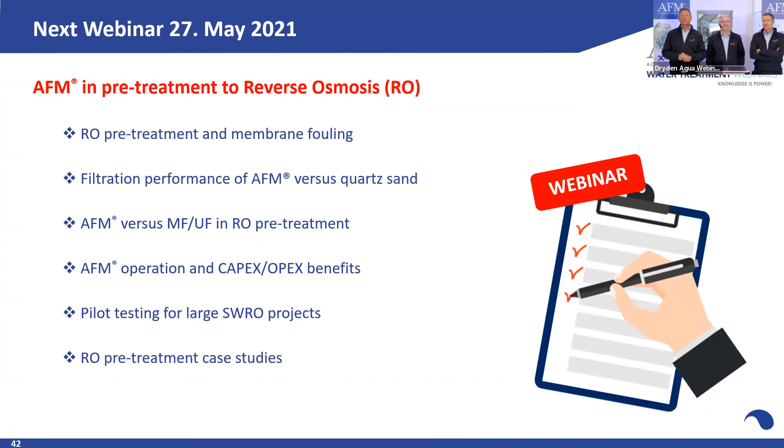So that's why we need to talk together. We need to get your data: process, raw water, product water data, and then we can go through this. Okay, we are a little bit over time, sorry for this, because of these two guys. In a week, we meet again, and then we talk about the pre-treatment of RO, and this is the agenda. And now it's time for Q&A.